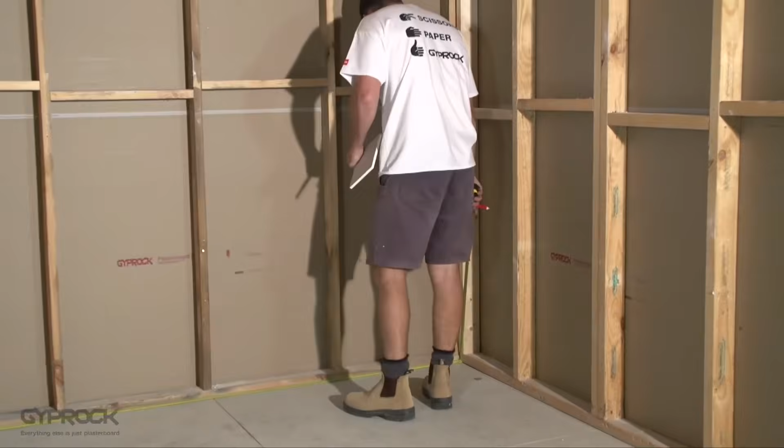Installing Gyprock Plasterboard and Cornice is easier than you might think, whether it's fixing a hole or installing a whole ceiling. The Gyprock DIY video series will show you everything you need to know to complete the project like a professional. In the first video, we'll take you through the basics that'll help you work out the best board to use and how to measure up and order what you need.

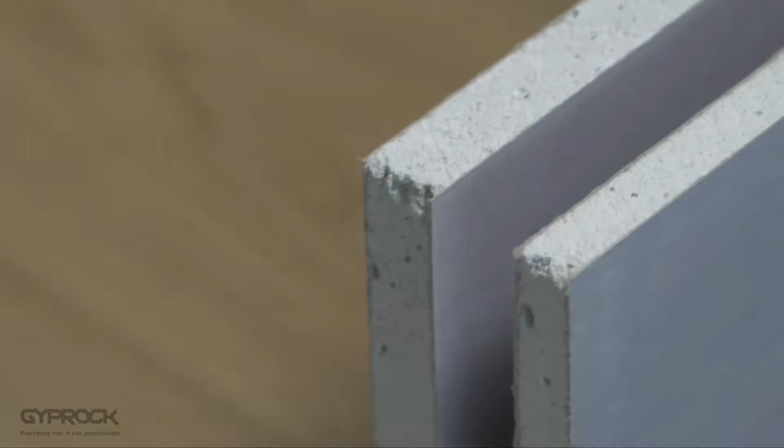So what is Gyprock Plasterboard? It's an internal wall and ceiling lining board or sheet made by encasing a gypsum core in a heavy-duty lining paper, making it strong, easy to handle and quick to install. Gyprock is very versatile and can be used to create stunning architectural features like niches, bulkheads and even coffered ceilings.

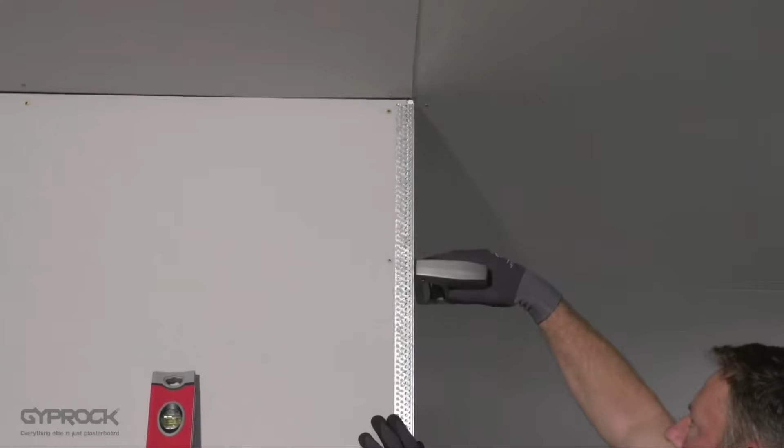The sheets are glued and nailed or screwed directly to the wall framing or ceiling joists. Then the recessed edges where the sheets meet are set with joint tape and 3 coats of compound to create a smooth, uniform surface ready for painting. Corner beads are used to strengthen the corner joints where walls meet and to protect against damage. Cornice is used to cover the junction between the walls and the ceiling and provide a decorative feature to complement your style.

The name Gyprock has become synonymous with plasterboard, and Gyprock manufactures a range of plasterboards to cater for different performance needs. Gyprock's standard 10mm plasterboard is the cost-effective wall lining board for most rooms in the house, also available in a 13mm thick board. Gyprock Supaceil has been specifically developed for ceilings to provide an excellent finish with no sag on standard 600mm joist spacings.

For wet areas like bathrooms and laundries, moisture-resistant Gyprock Aquachek is the best choice. For higher sound insulation for entertainment rooms and bedrooms, Gyprock Soundchek is ideal. And for corridors and stairways, Gyprock SuperCheck's reinforced core reduces the risk of damage.

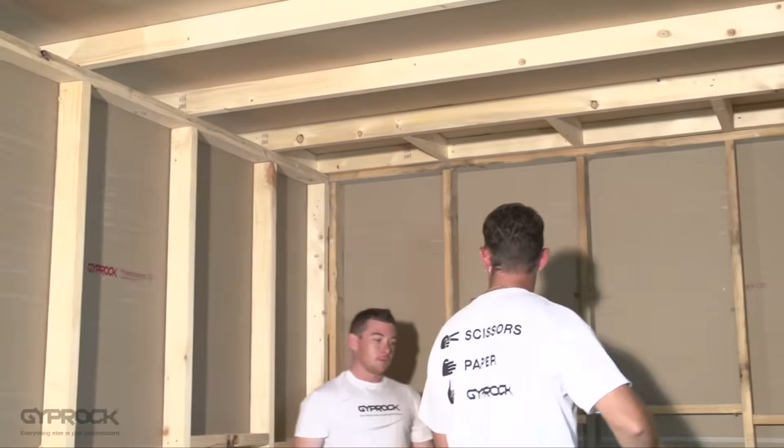Measure the width and height of each wall. Measure the width and height of any openings such as doors and windows. For ceilings, measure the width and length of the room. These measurements will also be used for ordering your cornice. It's best to plan your job to have the fewest number of joints possible. Gyprock Plasterboard and Cornice come in different widths and lengths to help reduce work and wastage. You'll find all the sizes available at gyprock.com.au.

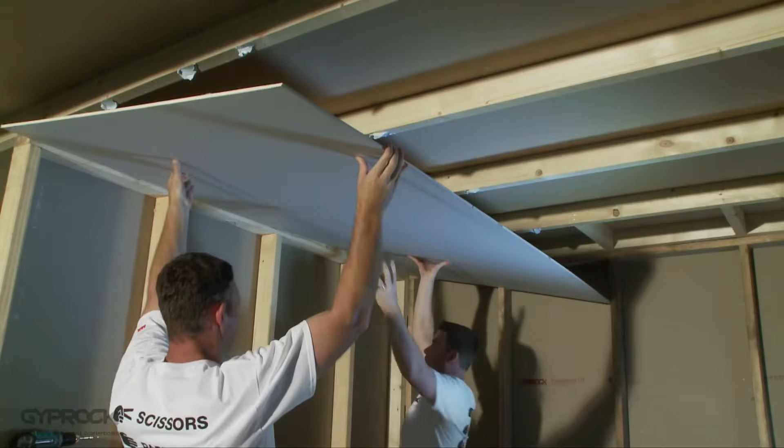The sheets are installed at right angles to wall studs and ceiling joists. That means for walls, they go on horizontally. For wall heights up to 2.4 metres, you'll use 2 1200mm wide boards. And for wall heights between 2.4 and 2.7 metres, you'll install 2 1350mm wide boards. This setout will cover the area with a single horizontal joint.

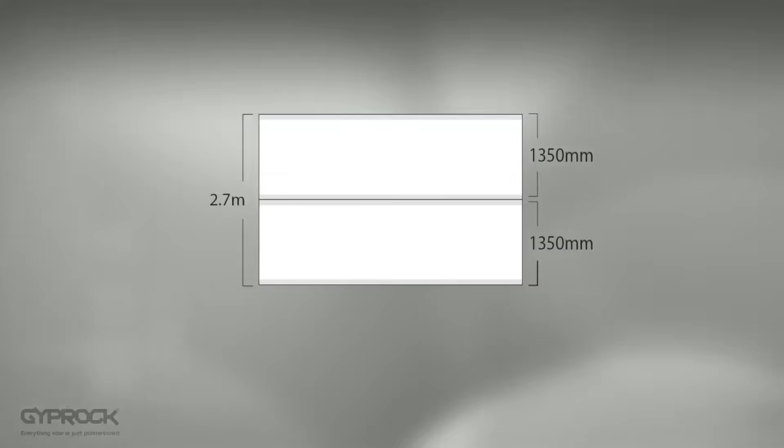If you'll be installing Gyprock Cornice and standard skirting, then stick with the RE board, which has recesses on both long edges. If you're thinking of square setting your ceiling, or you plan on very narrow skirting, then RE SE with one recessed edge and one square edge may be a better choice. To minimise butt joints, choose a board length which is at least the width of your wall.

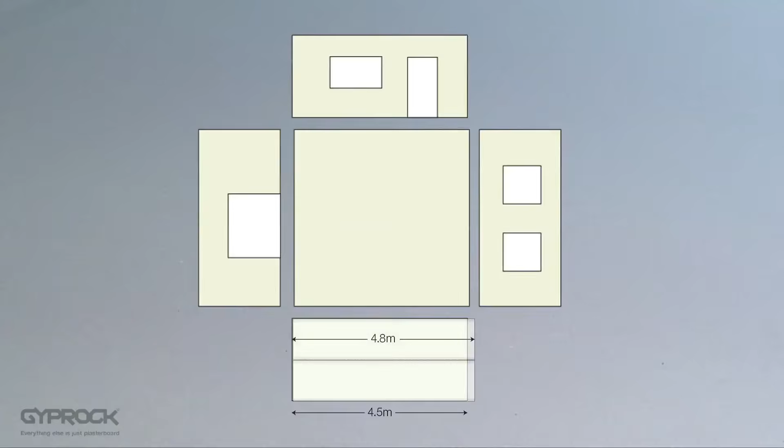For example, if you have a 4.5 metre wide wall, then a 4.8 metre board will mean less joints than 2.4 metre boards. For ceilings, select the board width that'll give you the least joints in the job. For example, for a 3.8 metre wide room, you'll need only 3 1350mm wide boards, compared with 4 1200mm wide boards. For your ceiling board length, use the same thinking as for walls.

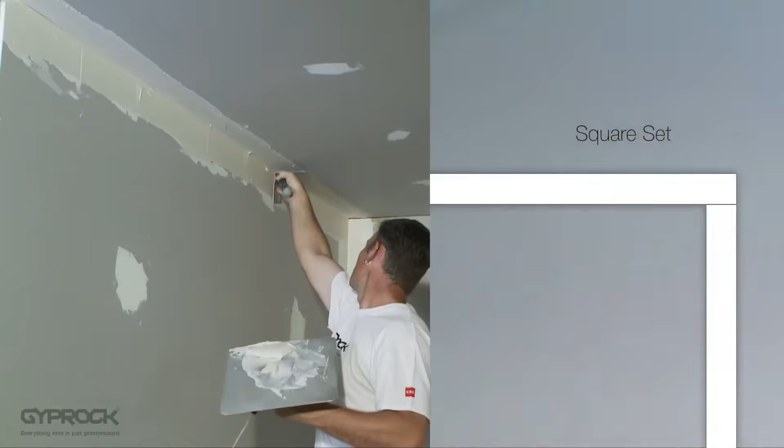If you plan to square set your ceiling, you'll need to make sure you have a square cut edge at the wall. Now you can list your different board requirements. It's a good idea to order around 10% extra in case of mistakes during installation. If you're unsure about your requirements, simply take your measurements along to a Gyprock Plasterboard supplier. They'll help you calculate what you need.

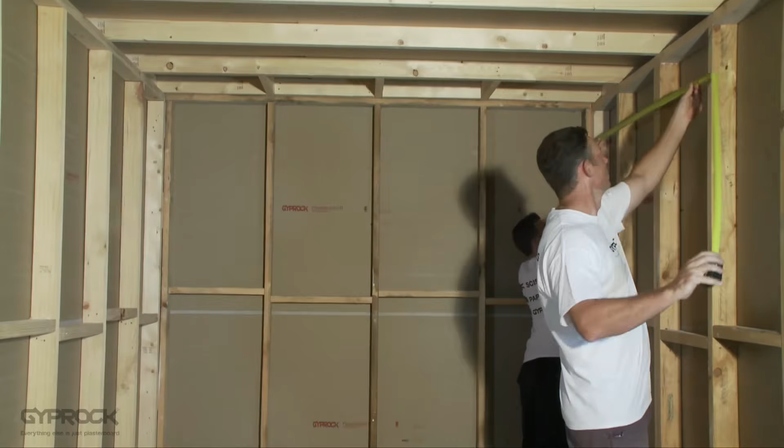Gyprock Cornice is available in a range of profiles and lengths, so select your preferred cornice, then select the lengths that best suit the length and width of your room with the fewest joints. For more detailed information about setting out for walls and ceilings, take a look at the Gyprock Residential Installation Guide available from gyprock.com.au. Apart from plasterboard and cornice, there are a few other things you're going to need.

As with all DIY projects, make sure you have safety glasses, gloves and a dust mask handy. You could also consider hearing protection if you'll be working in a loud environment. As well as your safety gear, you'll need tape measure and pencil, a straight edge to help mark and cut the board, a utility knife to score and snap the board, a keyhole or plasterboard saw for cutting out penetrations, and a fine-tooth saw for larger cuts.

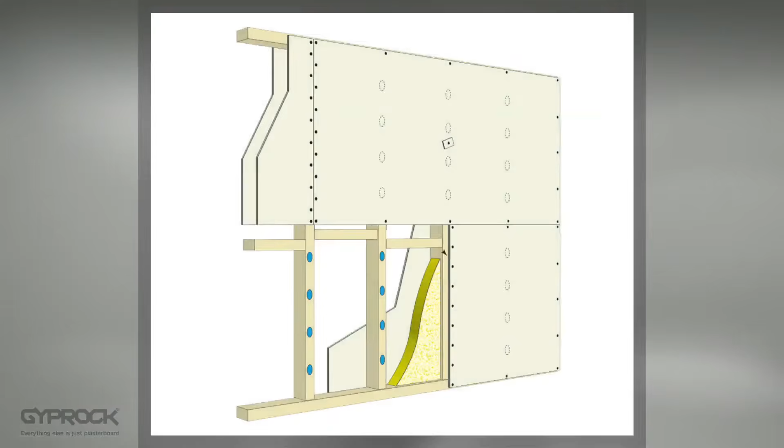For installing walls and ceilings to timber or steel frames, you'll need Gyprock stud adhesive to glue the board to the joists and studs, a 38mm broad knife to apply the adhesive, a hammer or cordless screwdriver. If you have a timber frame, 30mm ring shank nails or Type W 32mm coarse thread screws. For a steel frame, use number 6 Type S needle point or drill point screws depending on the frame thickness.

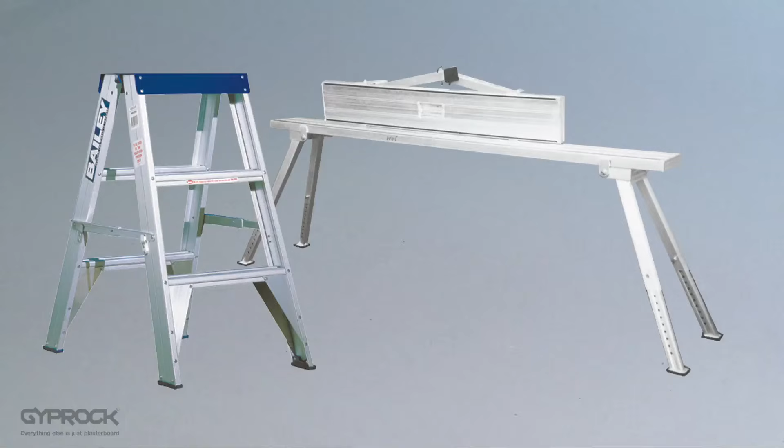A working platform and ladder to reach the ceiling and the top of walls. Small offcuts of board to use as packers to keep the board off the floor. You may also want to consider a plasterboard lifter to make installing the ceiling boards easier.

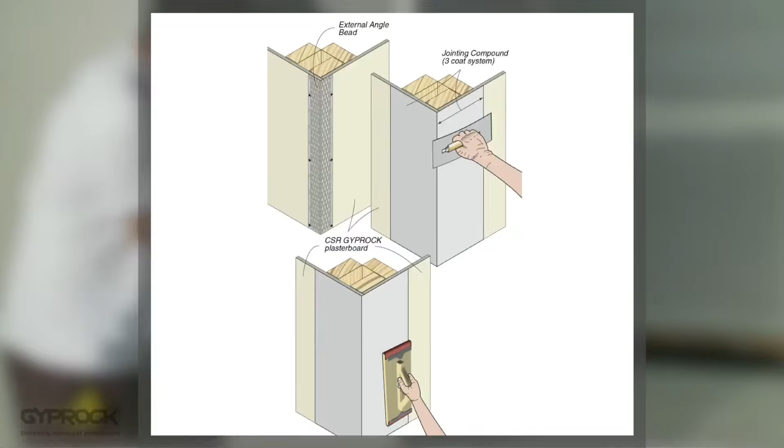Any corners that project into the room are finished with external angle corner beads, which are available in metal or PVC. If you're using metal corner beads, you'll need tin snips for cutting the bead, staple gun and staples to hold the angles in place. This works for both timber and steel frames. Or if you don't have a staple gun handy, you can use nails and a hammer for timber frames only.

For jointing the sheets, you'll need Gyprock jointing compounds, a roll of Gyprock perforated paper tape. For tools, you can choose disposable plastic tools for smaller jobs or professional steel tools that you can clean up and use for future projects. You'll need broad knives or trowels in 150mm, 200mm and 300mm. An internal corner trowel. A hawk is also a good idea to make loading your trowel a lot easier.

You'll also need a sanding float, either 150 grit sandpaper or 220 grit sanding mesh, a pole sander or working platform for ceilings, and a soft brush or cloth. For installing cornice, you'll need pencil and tape measure, Gyprock Cornice cement, a mitre box or a Gyprock mitre master if you're using Cove Cornice, a fine tooth saw, cornice small tool, 38mm broad knife, hammer and nails, water and a sponge for cleaning up.

Now you're ready to start work.